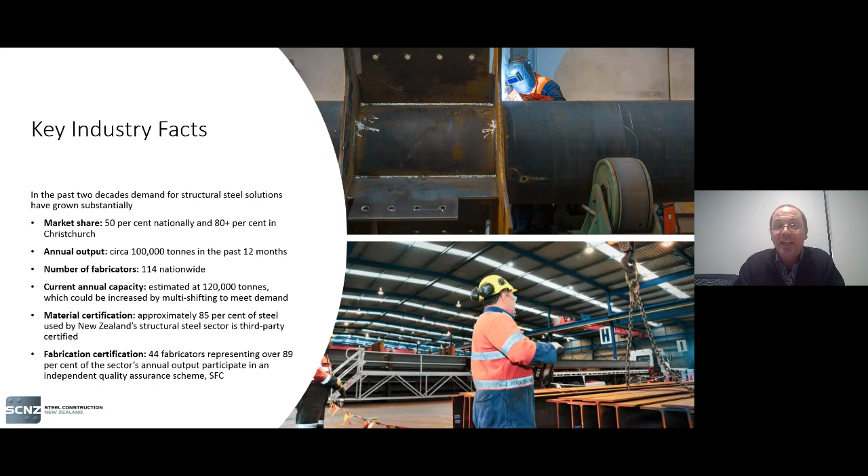So with that bit of introduction to Steel Construction New Zealand, I'll now hand over to Alistair to take us through the rest of this presentation. Well, good afternoon, everyone. Thanks, Martin and Kevin. This is really just a little bit of a roadmap of where we're going to be going in the next 40 minutes or so. I'll start with a bit of an introduction about the compliance topic.

I'll then give you a bit of an overview of AS/NZS 5131, which is hopefully what you're expecting to hear about today. And then the bulk of the time we'll spend, I'll be giving you, if you're an engineer, some tips on how you can get the quality of product you specify. And then at the end of the session, we'll wrap up, just talking a little bit about some of the things that industry's been doing to support the implementation of AS/NZS 5131.

So just by way of introduction, I'd like to pose the question: could compliance be the next leaky building crisis? My answer to that is, well, it could be if we don't manage the risk. And the reason I suggest that compliance could be the next leaky building crisis is that we do have all the ingredients for the perfect compliance storm. We've seen globalization of construction product supply chains in the last couple of decades. That's increased the risk of non-compliance.

Probably in the last couple of decades, we've seen supply of construction products coming mostly these days from Southeast Asia. Historically, we've seen it coming from North America, from Japan, from Australia. And so we've seen quite different supply chains.

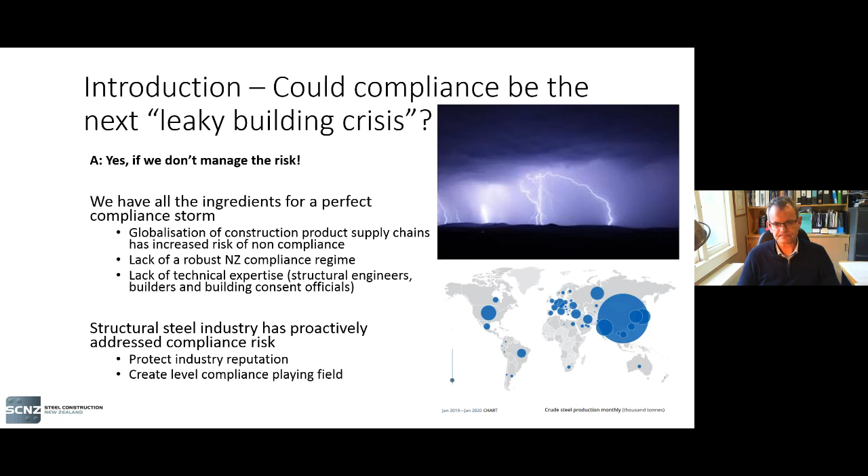In terms of the aims of the presentation, they're twofold. Firstly, if you're an engineer or building official, hopefully you'll get a better understanding of ASNZS 5131, of the provisions intended to regulate and establish the quality of structural steelwork. The second aim is that if you're an engineer, you'll take away some ideas to help address some of the limitations I'm going to highlight for ASNZS 5131 in terms of the quality management provisions. As a result, you'll actually get the quality of product that you specify.

So that's enough introduction, let's crack into thinking about ASNZS 5131. Hopefully if you're an engineer you're familiar with the standard - it specifies minimum requirements for fabrication and erection of structural steelwork. It was published in 2016. There has actually been a revision, or a revision is in train at the moment for the standard - we should see it sometime later this year. The implications for New Zealand are pretty minor, but I will touch on one of the more important changes as we go through the presentation.

This document was cited as a verification method in 2018, so it's recognised as a means of establishing compliance with the building code.

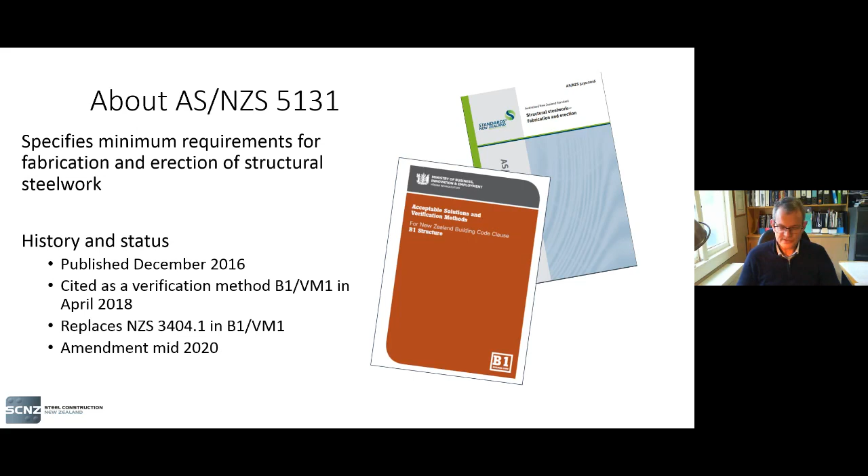What I'd like to do in terms of thinking about 5131 is discuss some of the key elements briefly. The first one is that it uses a risk-based approach, so it's not a one-size-fits-all set of requirements. It uses risk-based categorization of structure or elements of structure into one of four categories.

At one end of the risk spectrum we have CC1, the low-risk projects - these are really non-inhabited structures. CC2 would cover the majority of building structures in New Zealand. CC3 is when you're starting to get into higher risk projects, importance level 3 or 4, and structures with seismic systems that have high seismic demand.

One of the comments I'd make about the CC2 categorization is that probably for low risk buildings, the requirements in the standard are probably overly onerous. As a consequence, it's worth giving some consideration - and I think with AS/NZS 5131 potentially about to be amended - to thinking whether or not there could be almost a CC1 plus, which is really more for low risk buildings.

Because this is a risk-based standard, there are two types of provisions. Firstly, there are what I call general provisions applicable to all construction categories, and there's also construction category specific requirements. Some of the material traceability requirements become more onerous as the risk goes up. The weld quality management requirements likewise are construction category related. It's the engineer who specifies the construction category for the project.

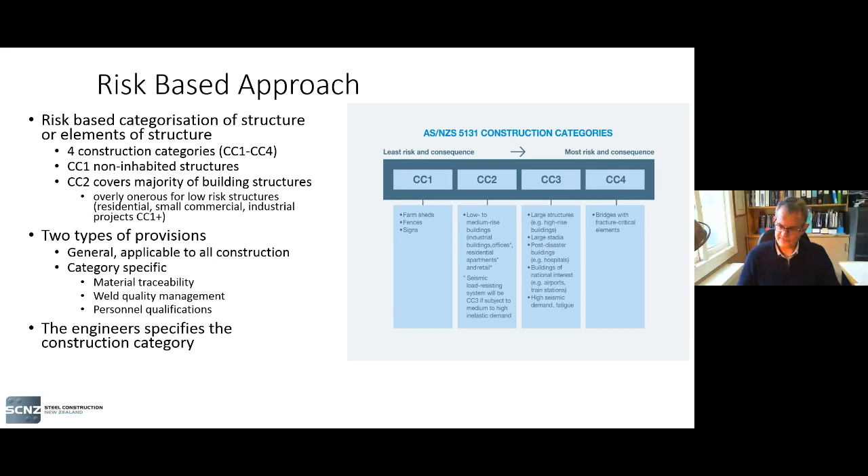The second element of ASNZS 5131 is that it includes technical requirements - it specifies minimum standards of workmanship. It gives tolerances for the plumbness of a structure on site. There are surface roughness limits if the steel's cut. In the welding standard, there are various defect levels that work has to comply with based on the weld quality categories.

There are also fabrication limitations. In the standard, there are limits on punching holes in steel. If you're using welding backing plates in a seismic application, the standard has specific requirements around how you have to detail the backing plate.

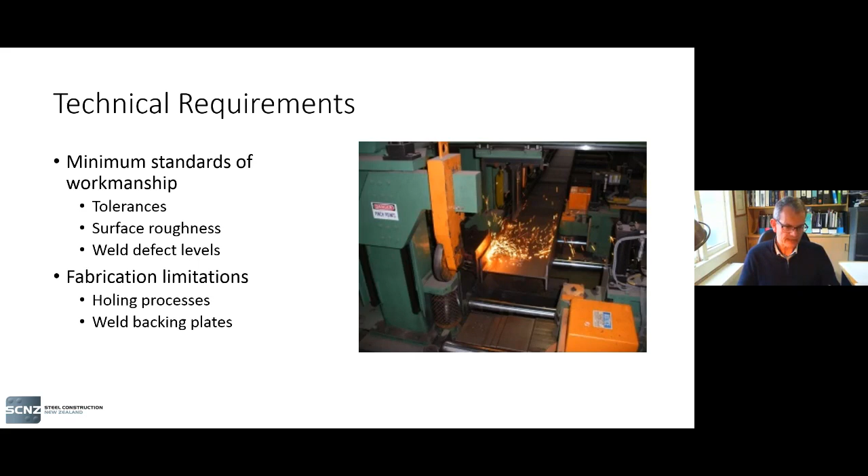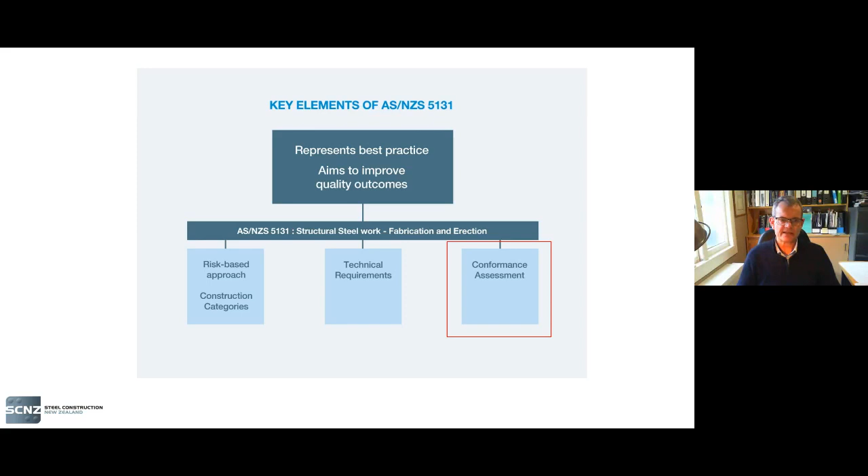The third element of AS/NZS 5131 that I want to look at is conformance assessment, and this is probably the most relevant part of the standard that I want to give some thought to today. I'll spend a bit more time discussing it.

The structural steel contractor is required to document, develop and operate a factory production control system. Put simply, a factory production control system is required to regulate the quality of the output of a fabricator, and it's also intended to demonstrate conformity with the requirements of the standard.

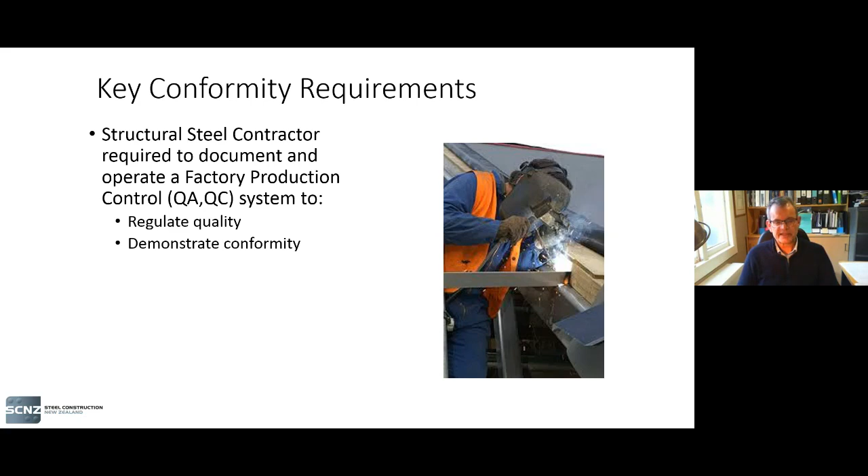In terms of the details, all the fabrication and erection activities in AS/NZS 5131 have to be operated under a quality management system. The fabricator will have to have procedures for all the key elements of work, competent personnel with requirements around qualifications, and fit for purpose equipment that has to be maintained and calibrated.

There are requirements around managing the quality of welding. There's a requirement for documentation, so they have to have quality systems documented, a quality plan specific to a project, and they'll create a lot of quality records as they go about operating their system. They also have to undertake inspection and testing at various stages of the work.

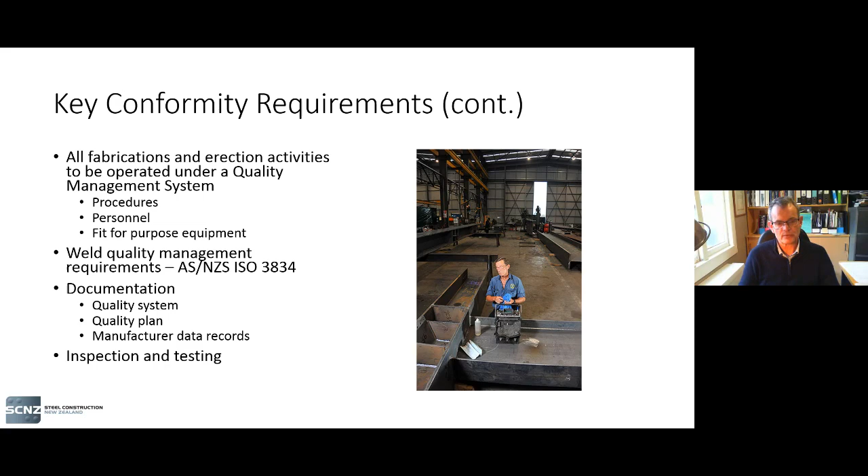So why is managing weld quality so important? In the 2016 version of AS/NZS 5131, there's an informative reference that weld quality has to be managed in accordance with AS/NZS ISO 3834, bit of a mouthful there. In the new version, they've actually mandated that weld quality has to be undertaken in accordance with this standard.

So why is welding such an important manufacturing process? One of the reasons the quality of welding has to be managed is that it's one of those processes where you cannot, after the fact, determine whether it's compliant without doing destructive testing on it, which isn't overly helpful. So the way the quality of welding is ensured is that the manufacturer or fabricator has to control all the key elements that go into the welding process.

ISO 3834 is an internationally recognized standard. It comes in three different levels: elementary, standard and comprehensive. In 5131, the weld quality requirements are related to construction categories. For CC1, it's the elementary level, CC2 is the standard level, and for CC3, it's comprehensive.

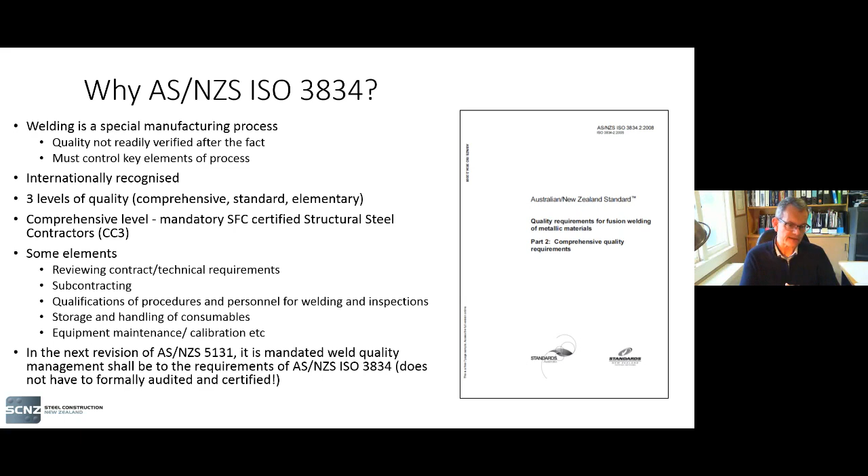Everything so far sounds great. You're probably thinking, wow, this is awesome - AS/NZS 5131 is the answer to all my quality prayers. I can rest easy now that if I specify to AS/NZS 5131, it's all going to work out really well. Well, I'm sorry to burst your bubble. There is just one thing you need to be aware of, which is quite a significant limitation of this standard.

Pretty much all standards associations adhere to what they call this principle of neutrality, which means they write standards in such a way that conformity or compliance with the standard can be assessed by any party. It could be first party, so that's the manufacturer goes away, does all the testing, and self-declares compliance, or it could be a third party - an independent party that comes in, does testing, does inspections, and makes some declaration of conformity. The reason they do this is that it's supposedly to avoid a technical barrier to trade.

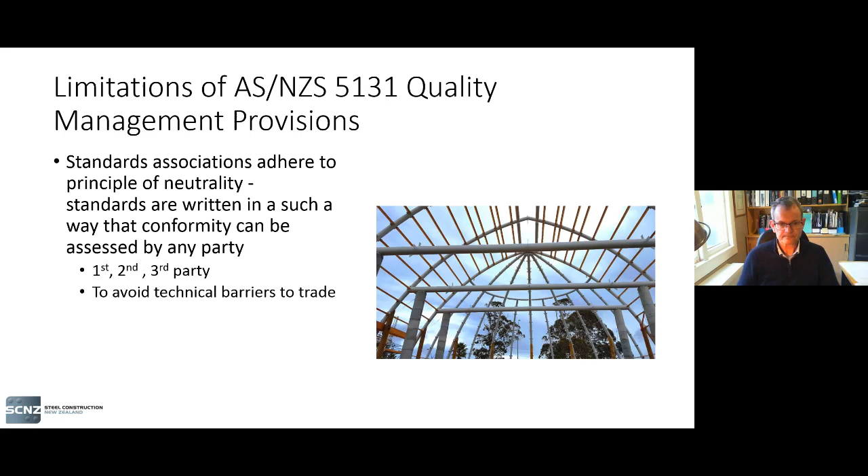And so the principle of neutrality, so what does this actually mean in practice? The reality is that the default requirement of AS/NZS 5131 is self-certification. So the steel constructor goes away, establishes a quality system, makes their own self-assessment of compliance with those requirements. During the process of a job, they undertake all the inspections and establish that it complies, because one of the things AS/NZS 5131 doesn't do is define the independence of inspection. It doesn't say who should be undertaking the inspections. The final step is that the steel constructor self-declares conformity, typically through a producer statement, PS3, that they issue. This relies on honesty and competency on the part of the steel contractor.

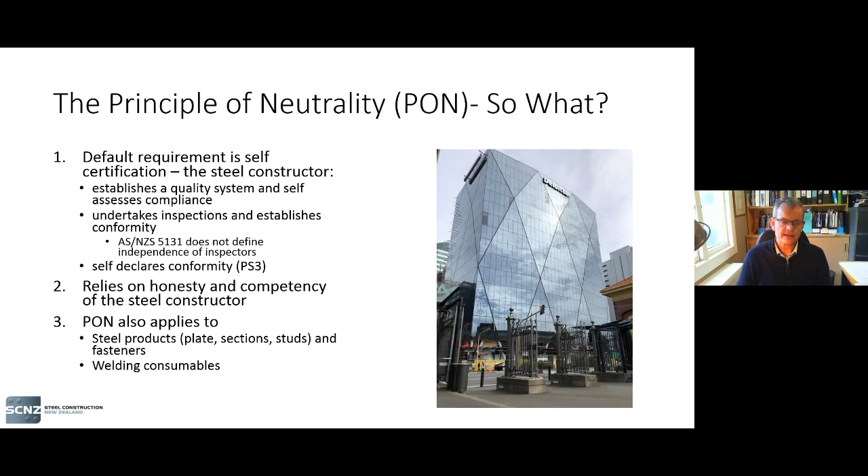Unfortunately, this principle of neutrality also applies to all the steel product standards, the plate standards, the section standards, the standards for supplying studs welded onto beams, the fastener standards, the welding standards. It's not just structural steel, it's any constructional materials with standards for conformity. Once again, it's written so that any party can determine compliance.

So the challenge for the engineer is: I'm not an expert in fabrication, so how do I know whether the steel constructor actually meets the FPC requirements of AS/NZS 5131? And following from that, do I actually trust all the paperwork I should get from the steel contractor?

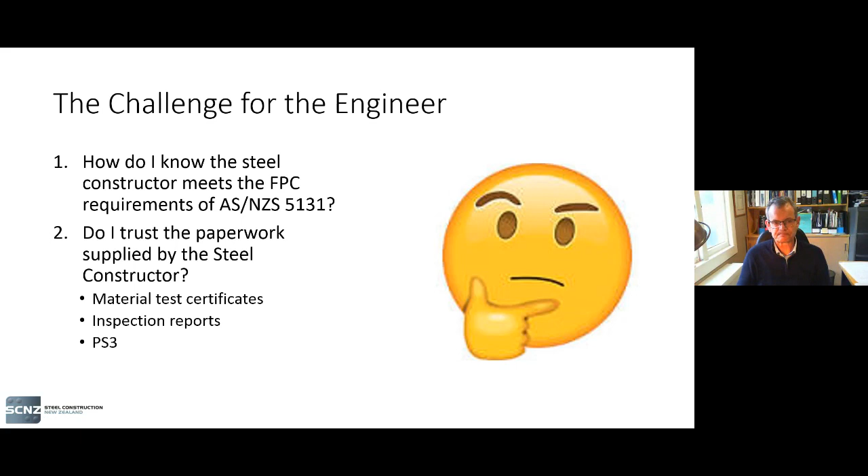So in summary, the AS/NZS 5131 quality management provisions are actually very comprehensive, and they're there to regulate and establish the quality of structural steelwork. Unfortunately, the principle of neutrality somewhat reduces or nullifies the effectiveness of some of these quality management tools. And as I've already alluded to, the building regulations don't address this deficiency. The bar is set pretty low - self-certification is all that's required.

As a consequence of this, the party that's probably best placed to address the limitations of AS/NZS 5131 is actually engineers, particularly in your specification. You have the opportunity to do some things that will give you a better chance of actually getting the quality of product you specify.

So in this section, I'm going to touch on some suggestions and recommendations on what you could do in your specification. Just by way of introduction, I want to say that most of the recommendations I'm presenting today come out of or are based on a couple of documents we've produced in the last year or two. The first is the New Zealand Structural Steelwork Specification, in compliance with AS/NZS 5131. We also wrote a Steel Advisor article, FAB 2001, which gives an overview of the quality management elements that go into this specification.

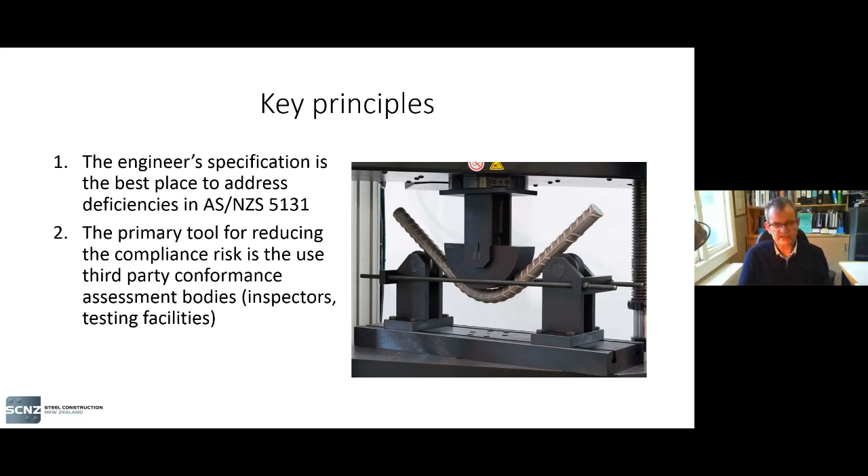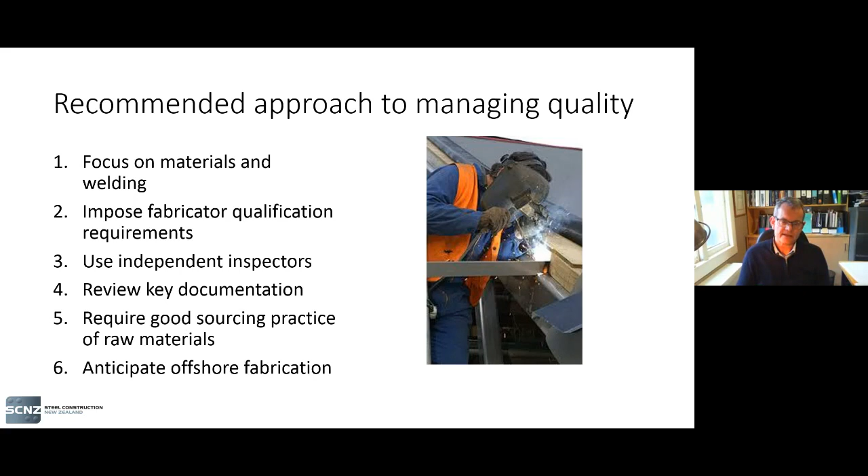I have six tips, six recommendations today. The first one is that as engineers, you should really focus on materials and welding. If you were unlucky enough to be an engineer on a job where all the steelwork arrived in a container with just a bit of paperwork in the corner, and you knew nothing about the origin of that steel, you wouldn't be able to figure out whether the materials and the welds were actually up to standard unless you did destructive testing on them. Pretty much everything else you could figure out by visual inspection, some measurements on site, and detect the rest of the issues. So my recommendation is focus on materials and weld quality.

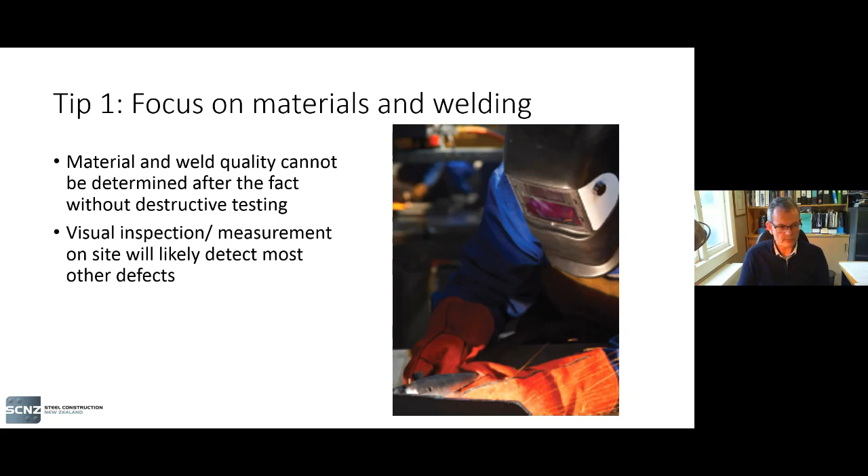Second tip is impose steel constructor qualification. What you're trying to do is weed out undesirable fabricators - cowboys. As an engineer, you're often quite removed from the fabricator selection process, so you need some requirements in your standard that'll actually provide a filter in terms of who gets selected.

What I recommend in terms of qualifications is that for your high risk project, CC3, you look at having some form of certification requirement for your fabricators. There are recognised fabricator certification programs - we have one in New Zealand, there's one in Australia, for Europe they have one, the Americans have one - or that you have a fabricator with certification to the world quality standard ISO 3834. There are certainly international operators that do that.

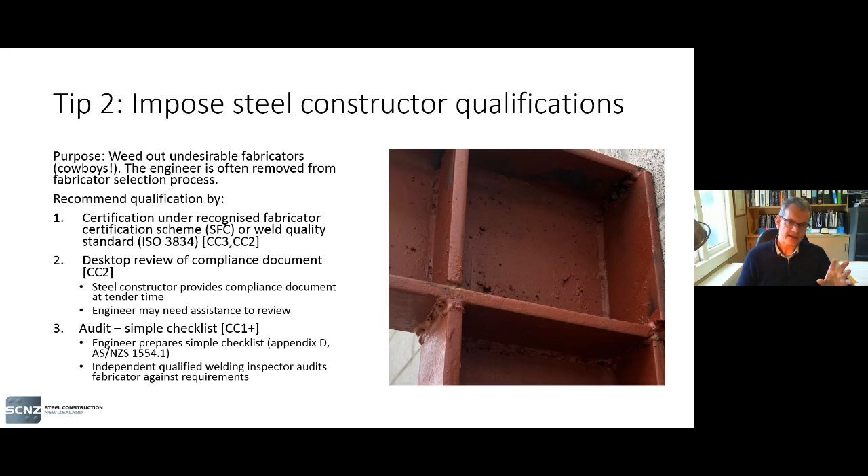This approach is probably quite suitable if you're working in provincial New Zealand. You'll probably find that a lot of the time you're not necessarily dealing with specialist structural steel fabricators - you'll get general engineering companies that might do trailers, fences, other sorts of work. They don't necessarily specialize in structural steel, so you at least want to make sure the key welding requirements are actually complied with.

Now, if you find there are some deficiencies for these very low risk projects - for example, lack of qualified personnel - the fabricator can actually contract personnel. That could be a welder or welders. They could also engage a qualified welding inspector who can supervise and inspect the welding.

I had a project, I'm based in Hawke's Bay, a small project last year. A good engineering company - they do stainless steel, pressure vessels, so they have very competent welders, but they do very little structural welding and weren't familiar with the welding standard, the fabrication standard. So they engaged a welding inspector who was appropriately qualified under 1554 to supervise and inspect the welding for the project. At the end, they gave me a note advising all the welding complied with AS/NZS 1554. I was happy with that.

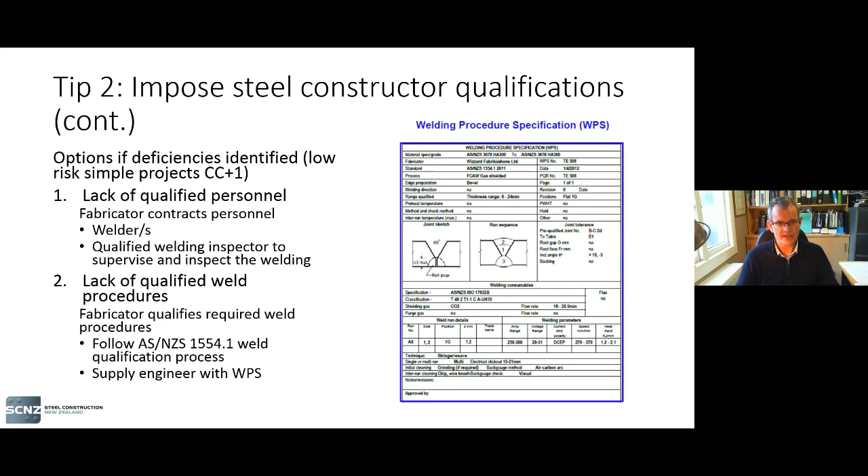So the third tip is to specify independent inspectors. AS/NZS 5131 requires a number of processes in the fabrication and erection processes to be inspected. And as I mentioned before, AS/NZS 5131 doesn't actually address the independence of inspection, doesn't say who should be undertaking the inspections.

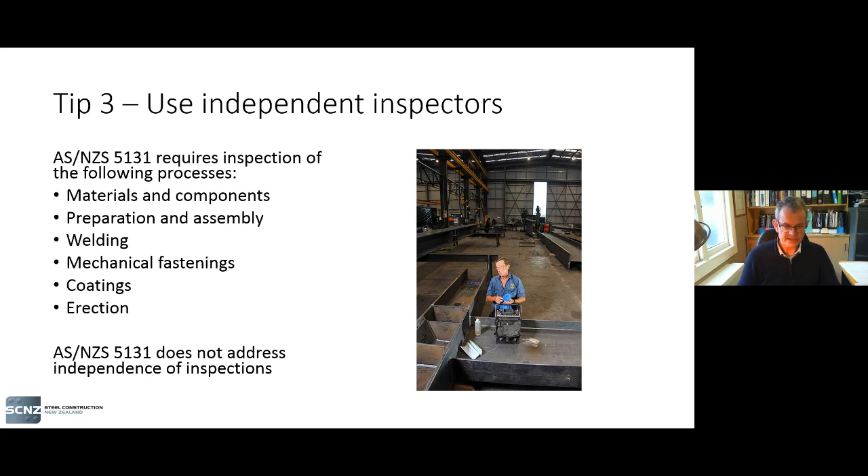Historically, in terms of New Zealand fabrication inspection practice, what we've seen when it comes to welding, typically the visual inspection - where the inspector is just taking a look at the weld, making sure it's the right type, the right size, particularly if it's a fillet weld - they're looking for surface defects. Typically, if the fabricator has a qualified in-house person, it's done in-house.

Typically for the non-visual inspections, which is your radiography, ultrasonic, magnetic particle, that would be outsourced.

When it comes to coatings, the independence of the inspector has always been dependent on the surface preparation - is it abrasive blast or just wire brush - and also on the corrosion environment. So where you have to have really good preparation, you've got a highly corrosive environment. Typically what's done, and what's recommended in AS/NZS 2312, is that you have an independent coatings inspector, and the remaining inspections would be undertaken in-house.

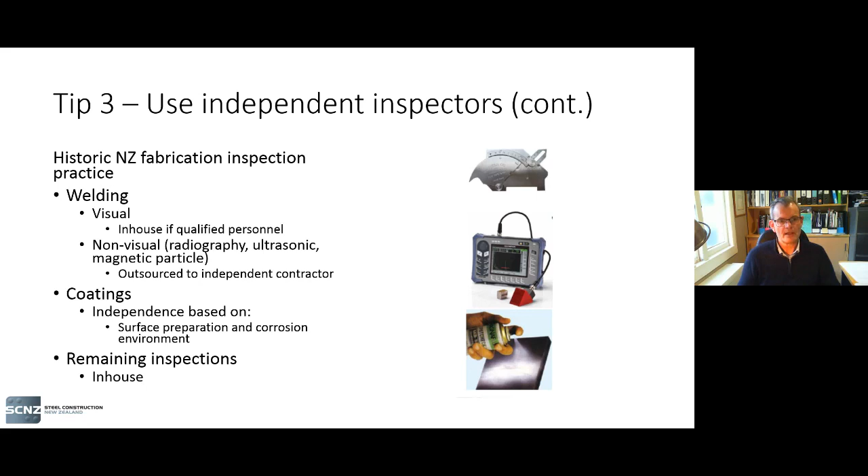What we're recommending is that in your specification, you essentially increase the use of independent inspection as the risk increases. So as you have fabricators that you perhaps have less confidence in, that aren't certified, or if you have projects where the project risk is high, it could be CC3, we certainly recommend using more independent inspection.

I suggest that you refer to our New Zealand structural steelwork specification. We've specified in that document the independence of inspections for all the key inspection tasks in 5131. We've related it to whether they're a certified fabricator or not, and what construction category it is. For CC1 plus, which is very simple structural fabrication, one suggestion is that you allow the welding supervisor to inspect the welds if they're appropriately qualified, if the work is simple, and if you trust the company. So good practice typically is to separate your welding supervision from your inspector, just to give some independence. Even if it's done within the same company, it's the same principle - you try to have different parties. That's not so important if it's a really simple project.

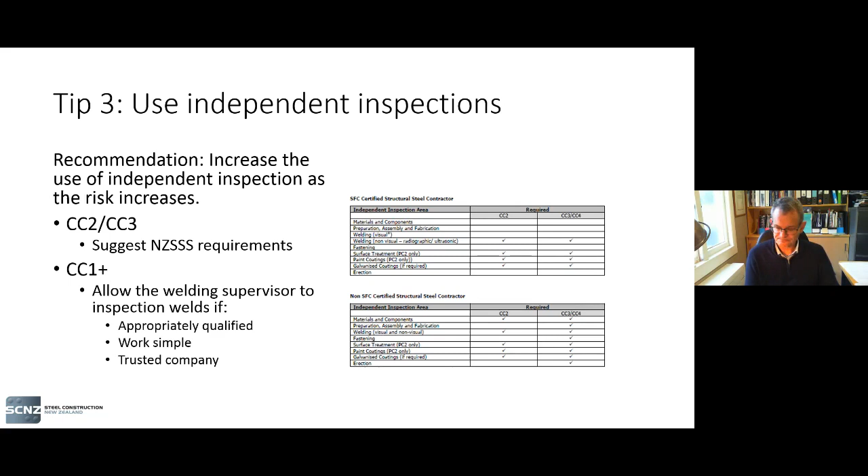Fourth tip - and I know engineers are loath to do this, you're sort of time poor - is that you really should review some key documents. AS/NZS 5131 requires quite a lot of documentation. As I mentioned before, the fabricator has to have a documented quality system, and they'll have to have a quality plan that's project specific, at least for CC3, or CC2 if the engineer asks for it.

They'll produce shop drawings, and that really depends on how complex the project is. If there's any automated fabrication going on, you'll typically find they'll have to develop a shop drawing. There'll be an inspection and test plan, and loads of manufacturing data - literally hundreds of pages the fabricator will generate. These will be all the material certificates, inspection reports, checklists, etc. There's way too much in there - you don't want to review it all.

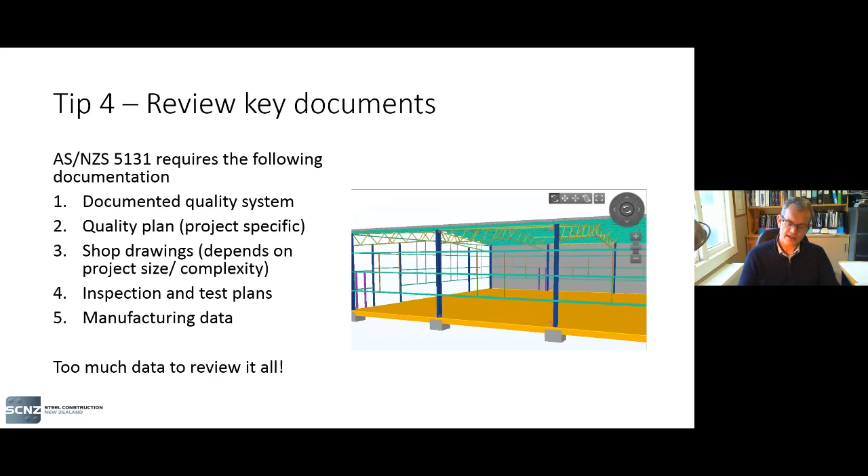But I am suggesting you give some attention to reviewing some key documents. So what am I going to suggest you focus on? Well, firstly, I think you should focus on having a quick look at the inspection and test plan, look at the material test certificates, and also have a quick look at the weld inspection reports.

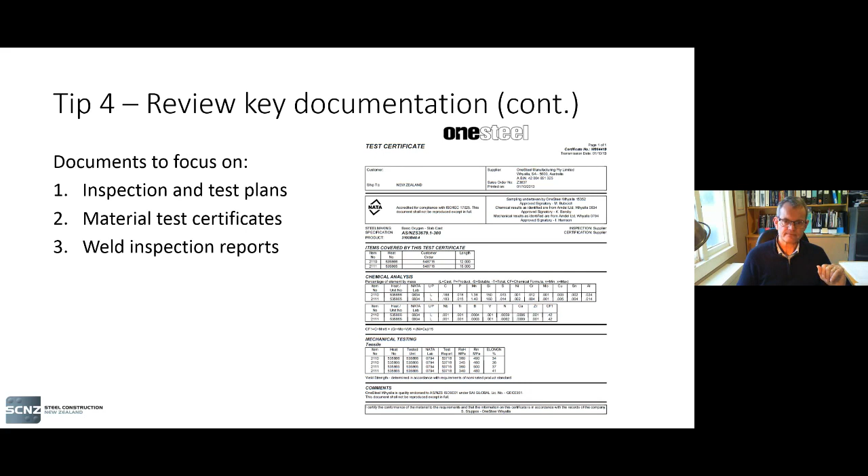So the inspection and test plan essentially lists all the inspection tasks and the sampling regime that is going to be used by the steel constructor for each of the inspection tasks. It will include acceptance criteria. It will also say when it needs to be done, particularly with welds. There could be hold points and who has to do it.

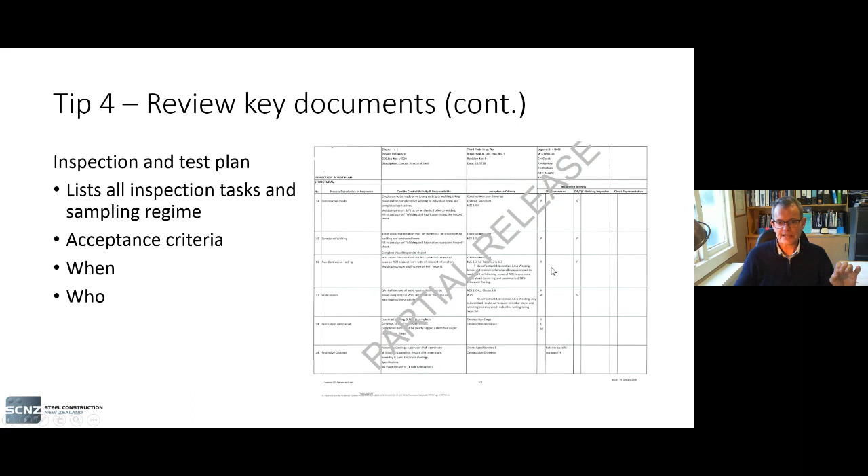They also have listed who needs to be involved with various inspections. So you see here, this is your welding supervisor - they have to review the welds. And here, this is your welding inspector - their job is to perform the inspection in accordance with 1554 Part 1, which specifies what the inspector has to do and the details of the inspection report. You can see there's no role there for the client's representative in doing any non-destructive testing.

So the inspection task list will be a mixture of what you put in your specification. If you have requirements around welding and coatings particularly, they should turn up in the inspection task list. What you don't address should be covered under their standard operating procedures - they'll have default inspection requirements of their own that they'll use if you don't tell them anything else.

So what's the value of the ITP? Why am I suggesting you spend time doing this review? Well, firstly, you want to make sure the fabricator actually read your specification. And secondly, even if they did, did they correctly interpret it?

One of the challenges with the risk-based approach in the back of ASNZS 5131 is that it can be a little bit complicated for the fabricator to work out the requirements. If it's a seismic situation, you have seismic demand categories and another factor in there. So they have to go through a bit of a risk matrix and figure out for all the different types of connections what the sampling regime is. So you might want to have a quick look to make sure they understood that table and applied it correctly.

I was listening recently to a presentation given by Andrew Boyd of Auckland Council to the Auckland Structural Group of engineers. One of the questions raised in the Q&A was from an engineer commenting that he had a job and wasn't happy with the amount of non-destructive examination undertaken by the fabricator at the end of the job. Now, if that engineer had actually asked for an ITP and reviewed it before the job even started, he would have known exactly what sampling regime that fabricator was going to use. They would have found out if there was a disconnect between their expectation and the fabricator's very early in the piece.

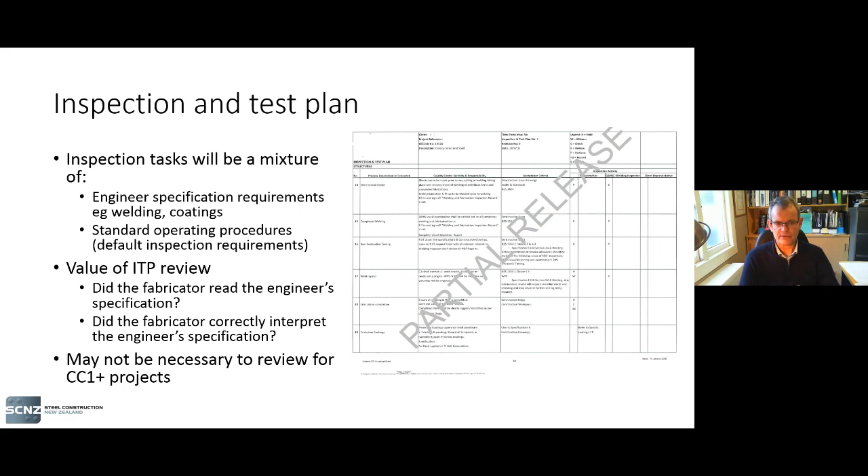I mentioned before manufacturing data. Screeds of this will be generated during a job, particularly if it's a complex one. My suggestion is that what you want to look at is the material test certificates for the structural steel products. I also recommend that you review it prior to fabrication.

I don't know how many times we've had situations where the engineer has waited till it's code of compliance time. They've been asked to supply one and then they've gone, oops, better have a look at some mill certificates. They've asked the fabricator for it - oh dear, there's a problem. Not a good time to find out you've got a problem. So my suggestion is that you ask to get your mill certificates prior to fabrication.

What you're really looking to do is check sizes, grades, and really quite importantly, particularly if you've asked for certified product, you want to make sure they've got product from a manufacturer whose product range is certified. The second item I suggest you look at are the weld inspection reports. I wouldn't suggest you trawl through all the pages of those reports.

What I'd look for is just at the front of each report, there'll be a summary statement. What you want to do is have a look at that, and also make sure that the weld inspection reports cover essentially the quantum of the work and the really key connections. So if you've got hard-working seismic frames, I'd be homing in, making sure you can see weld inspection reports for those really critical welds.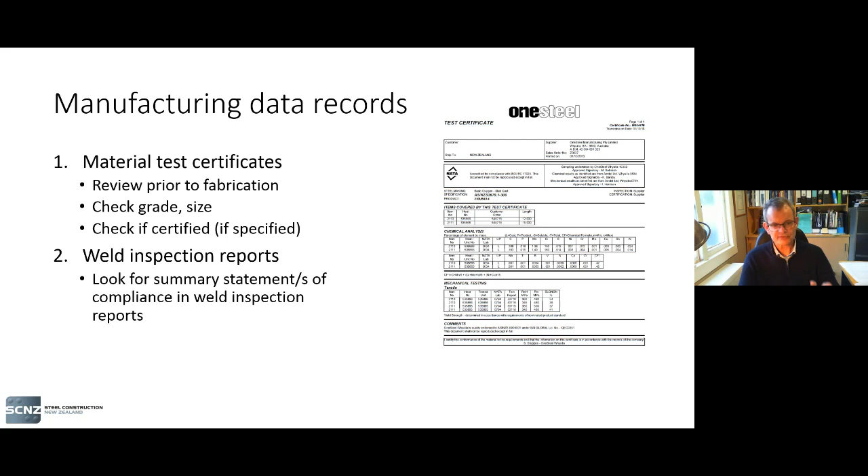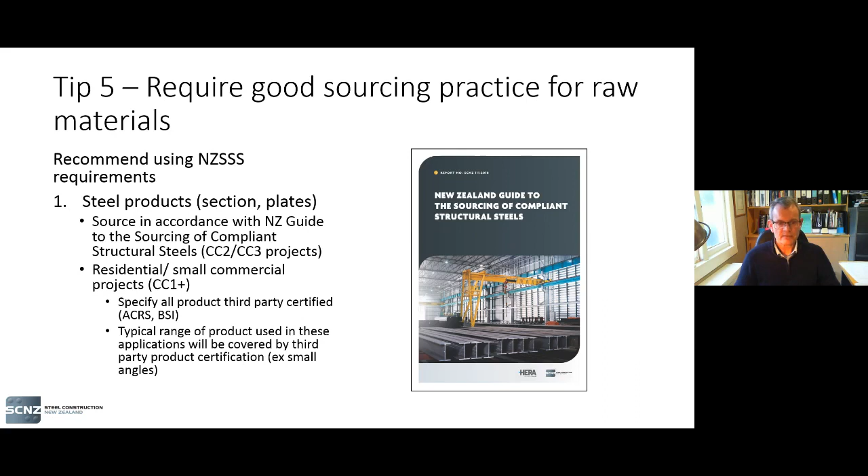So in terms of this guide, why did we produce it? Well, we're obviously keen to reduce the compliance risk. As Kevin has said, over 80% of the structural steel supplied to the New Zealand market is covered by product certification. The reason we developed this guide was just to give some pathways for demonstrating compliance for a non-certified product, particularly if you have a high-risk project.

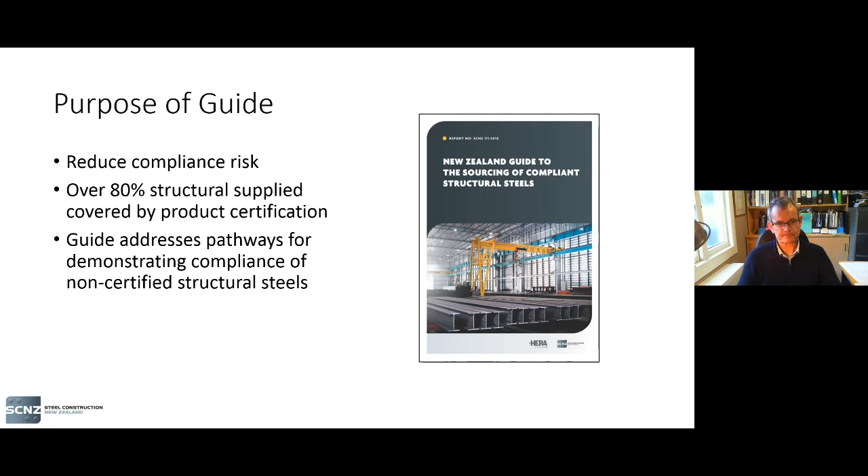So the guide uses a risk-based approach in terms of demonstrating conformity. It considers the project risk, which we've already discussed, keyed into the 5131 construction categories. We've also developed steel source risk categories, 1 to 4.

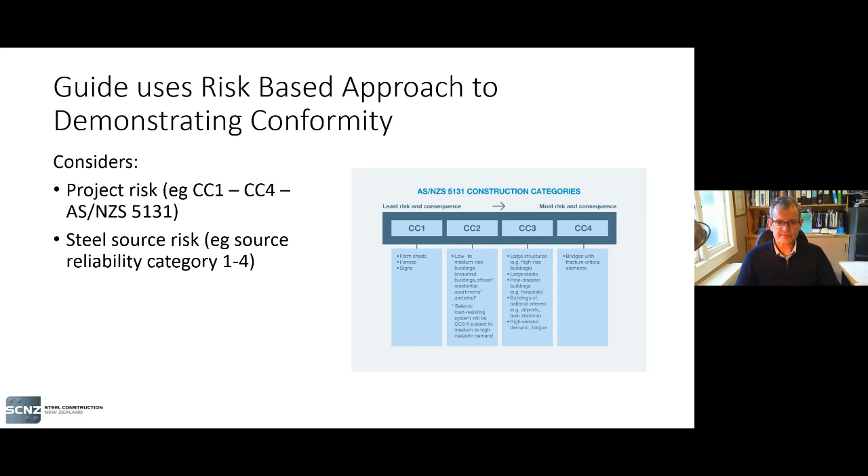In terms of these source risk reliability categories, the way we've categorized steels really comes down to what role third parties have played - either auditing the factories and making sure their factory production control systems are appropriate and certified, or being involved with independent testing of product. So the most reliable product is source reliability category 1.

That's product covered by a robust product certification scheme. The least reliable source reliability category is category 4 - that's a steel maker where no third parties have been involved. They haven't had anybody come in to look at their quality controls, their factory production control system, or their product. These people essentially self-certify the quality of their product.

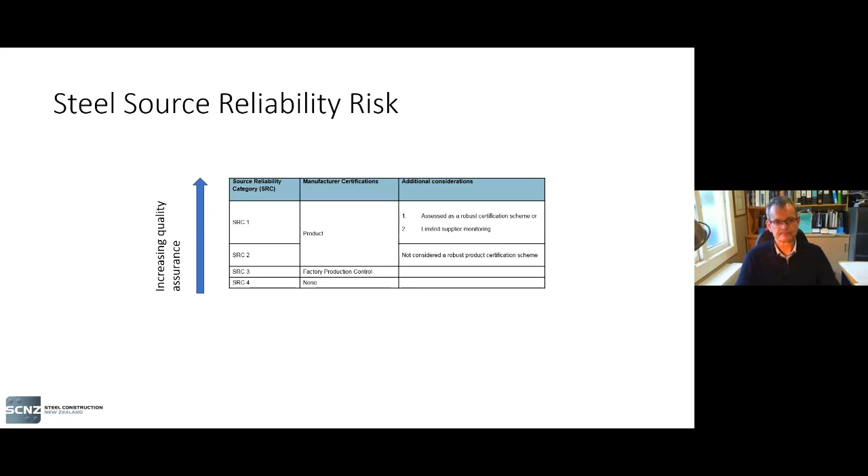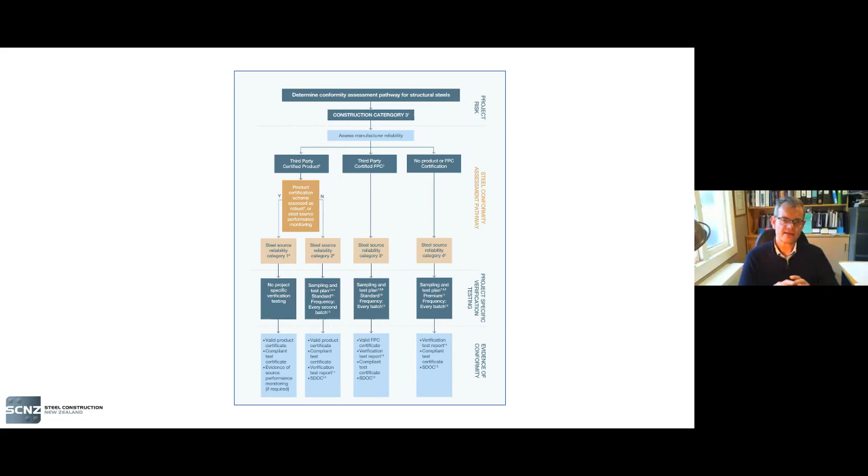Even though the guide's about 50 pages, you can actually distill the document down to 2 pages - there's 2 flow diagrams. The rest of the document is really just explanation that will help you understand the diagram if there's some things you don't understand.

So there are 2 of these diagrams - one's for construction category 3, one's for construction category 2. And you'll see as you come down, here's your steel source reliability categories. Over here, this is your robust product certification scheme. Over here, this is your least reliable source, source category 4. So essentially what you do is you come down here.

This is really the critical part of the diagram, where you're answering the question: is any independent testing warranted? If it's a product covered by a robust product certification scheme, the answer will always be no. If you've got a project that's high risk, with high risk materials, you'll find there'll be a requirement to test.

So in this flow diagram, we not only say whether you should be testing, but we've also developed some sampling and testing plans, so as an engineer you don't even have to dream them up. We've also got some sampling regimes - we actually specify how often they should sample. And then we've also got requirements around what the inspection reports and the supplier declaration of conformity should look like once the importer has gone through the process, including a discussion around what evidence should be supplied with the product and what paperwork should accompany the steelwork or the steel.

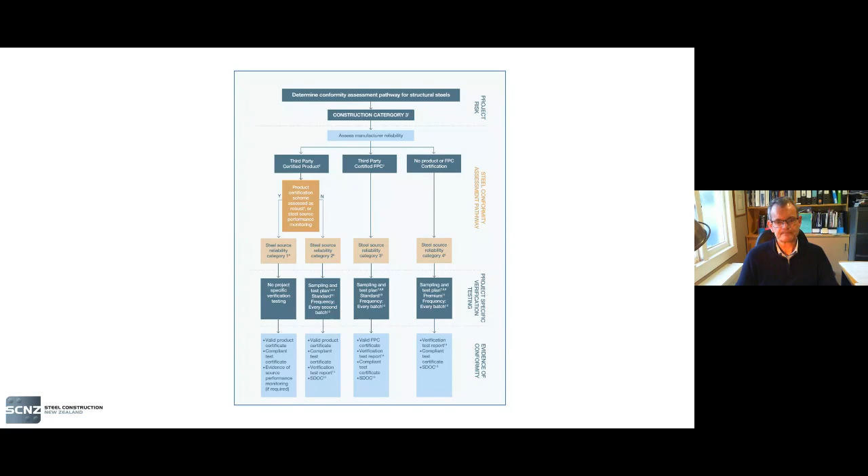Not only do we suggest good practices for sourcing your structural steels, but also the fasteners and anchor bolts. What we recommend is that for your critical connections, for CC2 to CC4 projects, you want to have independent verification testing undertaken.

We've developed some Steel Advisor articles, MAT 1010 and 1011. We've specified some sampling and test plans for bolts and anchors, but we now consider them to be overly onerous. If this is a regular supplier, the sampling levels would be more appropriate as if you had a first-time supplier. We will be amending those Steel Advisor articles in light of the fact that we're currently working on a bolt importer charter, and once we launch that charter, we'll be updating those articles.

So why are we recommending that for your critical connections you should have some verification testing undertaken? Well, the first reason is that none of the product supplied to the New Zealand market is covered by a third-party product certification scheme. All of it comes from Southeast Asia. The anchor bolt standard DIN 976 Part 1 has no mandatory conformity assessment requirements, no requirements for the manufacturer to operate any systems to control quality, no mandatory testing requirements. Furthermore, there's lots of manufacturers—it's bought on price, not quality. So these items represent high-risk compliance items, and hence we recommend for critical connections that some testing is undertaken on the fasteners.

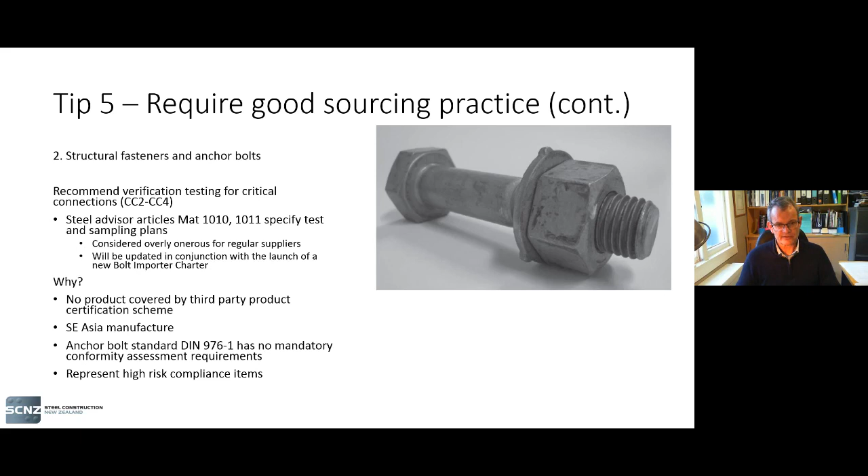The sixth tip or suggestion is that you anticipate offshore fabrication. Unless you're only involved in very small projects where it's not worth the time, effort and hassle for a builder or developer to consider offshore fabrication, you're going to end up at some stage having to deal with it, or at least a client or builder that shows interest in doing it. My suggestion is it's better to front foot it—better to address it in your specification, even if most of the time it's never required.

SCNZ has had a number of engineers come to them when they're in a bit of a pickle. They've had a job, specified it in ASNZS steels, to all the New Zealand, Australian welding and fabrication standards, and assumed that's what would happen. But the client signed up a builder who'd come in with an offer from China, and agreed all the terms and conditions. The engineer wasn't involved in the process and was on the back foot from day one trying to manage that process. At the end of the day, they were left carrying the baby, having to sign it off. So my suggestion is, rather than reacting on the back foot, you address it in your specification.

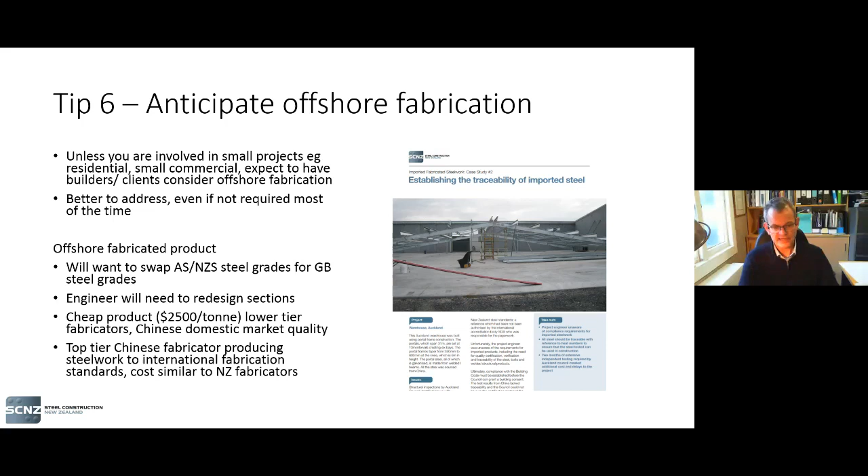In terms of matters to consider for offshore fabrication, you need to think about whether you will allow a change of standards - whether you'll allow them to change the product standard or the fabrication standard or both. Just be aware that's an alternative solution, not a verification method, so it requires somebody with specialist expertise - which most structural engineers in New Zealand won't have - to make an assessment that the use of these standards with NZS 3404 is okay and compatible with the assumptions and requirements of the standard.

Firstly, regarding design assumptions: when they did the calibration exercise to work out the strength reduction factors in NZS 3404, they made assumptions about geometrical properties of the sections and about weld defect levels tied into the weld quality categories in 1554. Also, the NZS 3404 material selection provisions to avoid brittle fracture are based on Australian steels and test data, so they will not be reliable if somebody needs to select materials to other standards.

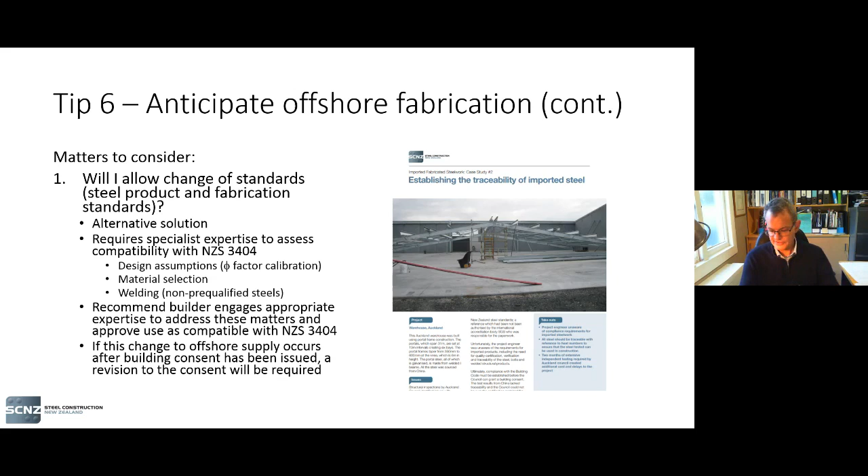Some other suggestions for addressing offshore fabrication: I would have a requirement that a trusted third party has to actually go in and do a factory audit to see the fabricator, regardless of whether it's China, Thailand, wherever. Somebody you trust has to go in and audit them against the requirements of AS/NZS 5131 and give you written confirmation that they comply.

I also recommend requiring trusted independent inspections of critical processes - things such as material sample collection. Somewhere in China there's going to be a steel mill, and you want somebody you trust to oversee the collection of samples and make sure they get to the test facility. They have very good test facilities in China, but you can't always be confident that what they actually tested was from steel in your project.

The other critical process is you want a trusted welding inspector all over the welding operations - present preparing the welds, during the welding, and doing the post-welding inspections. A final suggestion: what's required to release the steel for shipping is typically 100% payment, and once that money is received there's no comeback on that steel. So my suggestion is you get your trusted party to inspect all the steel before it goes into the container, and they provide written confirmation that it complies before it's shipped.

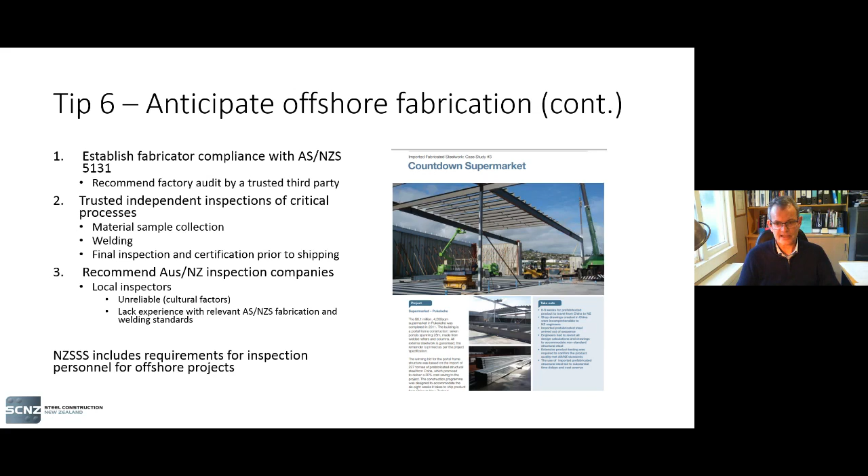So we're in the home straight now. What I'd like to do now is talk just a little bit about what SCNZ has been doing to support the implementation of ASNZS 5131 in New Zealand.

The first thing I want to touch on is engineering training. Today we've given you a whistle-stop tour of 5131, with some high-level recommendations around what you can do in your specification, but we haven't gone into too much detail. If you're an engineer involved with construction monitoring, we're running a 2-day course ideal for you if you're not that confident in understanding structural steelwork processes, what can go wrong, and what you need to look out for. I certainly suggest you attend this course.

It's a 2-day course. The first day will be in October, the second day will be in November. Because welding is such an important part of the fabrication process, we're dedicating a whole day to that. So watch this space, we'll give you information when we've confirmed the dates.

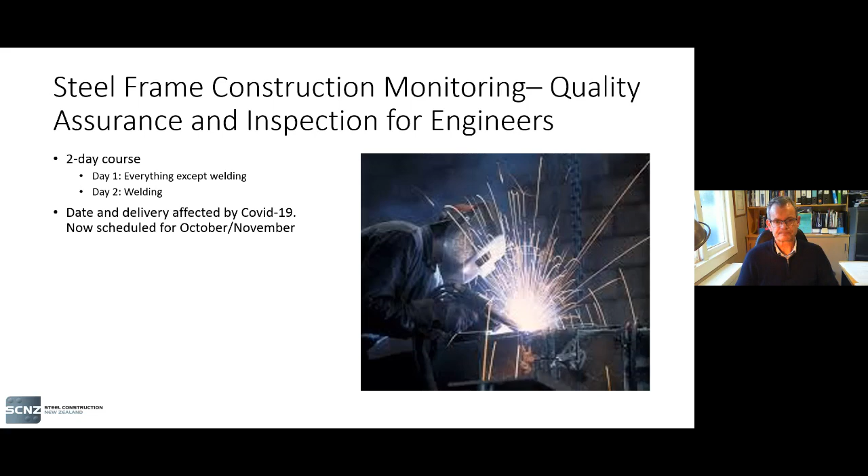We've also got some upcoming webinars next month. The first one I'm going to talk about is stud welding. We've just developed a new fact sheet on stud welding where we overview the key quality management requirements of ASNZS 1554 Part 2. We also discuss roles and responsibilities for the builder, the stud welder, and the engineer.

We're also going to be running a welding course, talking about welding particularly from an engineer's point of view in terms of specifying welds. So we'll be thinking about when you would specify the different weld quality categories, and when you might call up fillets, partial pen, and full pen butt welds. What are some of the pros and cons? When might you specify them? So that's something to look out for as well.

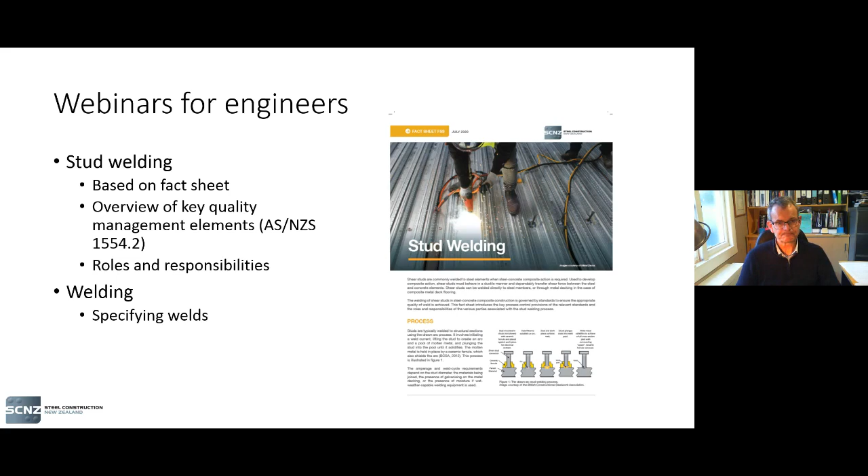We've been pretty active in the last several years developing publications, and we've referenced a number of them today. To help engineers and building consent officials get access to these documents, we've developed the Compliance Toolbox fact sheet. It comes in both hard copy and online. If you go onto our website, to the Compliance Toolbox, we have links to all the documents we reference, all the documents discussed today. So I encourage you to go to www.scnz.org.

Kevin's mentioned we've had some steel industry quality initiatives, so I want to quickly give you an overview. Hopefully you're familiar with our steel fabricator certification scheme, and you're specifying certified fabricators for your projects. The scheme was launched in 2014. Essentially it's independent expert assessment of the compliance of a fabricator with the ASNZS 5131 construction category, so they get certified to a particular construction category. The certifying body is HERA Certifications Limited, with a governance structure behind it. Companies get certified for a 5-year period, with annual surveillance audits.

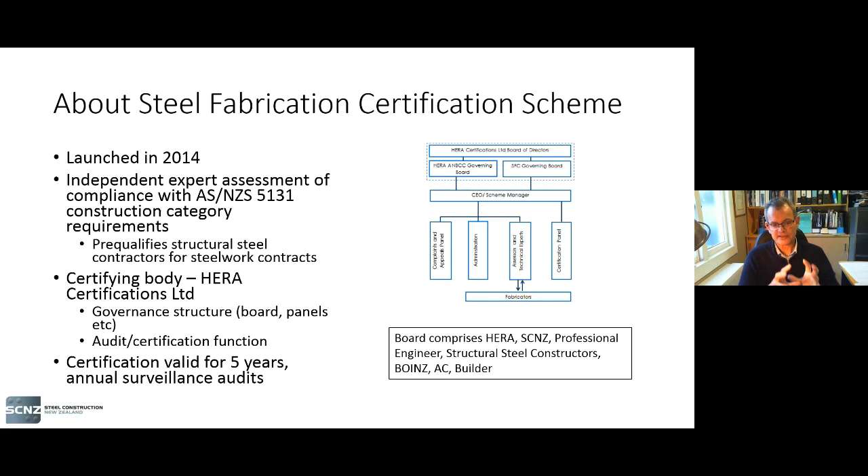Back in 2014 when we launched the scheme, there were 8 steel constructors certified. We now have 44, and the number is going up by the day. They represent about 85% of the New Zealand industry by output. If you want to know who's a certified fabricator and where to find them, go to www.steelfabcert.co.nz.

We have pretty good coverage these days of New Zealand. Obviously we have the main centres, Auckland, Wellington, Christchurch. We have them in Dunedin, Balclutha, Queenstown, Palmerston, Hawke's Bay, even Gisborne has them, and we have them in Tauranga.

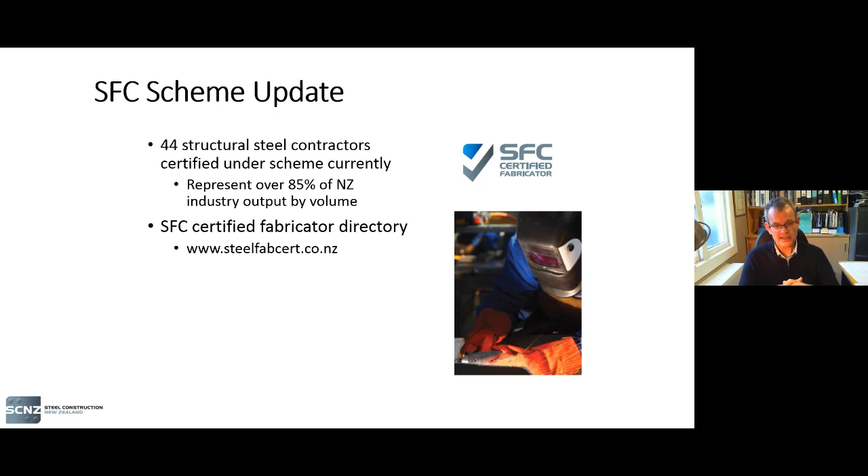Last year we launched a charter scheme for our steel distributors. I don't know if you appreciate this, but pretty much all the structural steel used in New Zealand building and infrastructure projects is imported. We have a very small amount that comes from New Zealand Steel, a plate or coil mill, so everything they produce is flat. Some of their product is used as plate, and some gets to market as welded sections through their Steltech business. Most of the product from steel importers, probably over 60%, comes from Australia, with the remainder from Southeast Asia.

And because these days they're sourcing through global procurement, it's become more risky in terms of sourcing.

These importers have to be more sophisticated in their procurement. So we've developed this charter to essentially reward and promote good procurement practice, with implementation rules and audit requirements. The 6 chartered companies all had to be independently audited, with written confirmation that they comply. If you want more detail, check our website fact sheet. Key requirements include having due diligence procedures for new suppliers, and monitoring procedures for regular suppliers, including engaging a metallurgist to help set up a testing or quality control regime for each steel supplier.